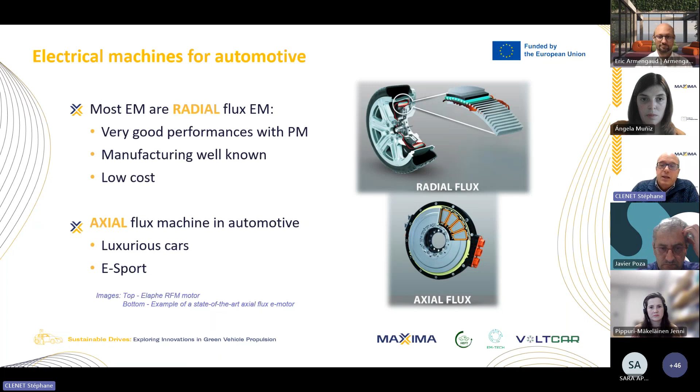Here, I don't know if you can see my pointer.

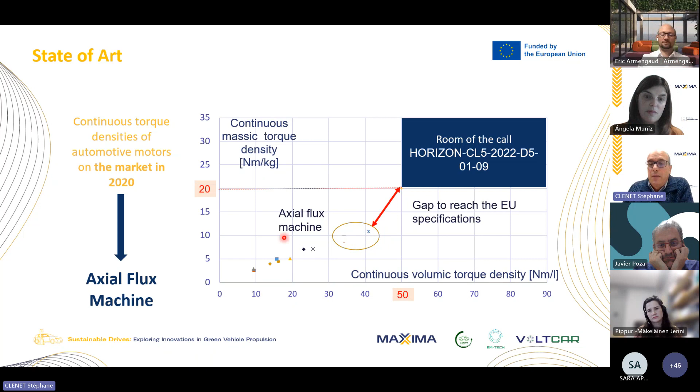Okay, so here you have the target of the project. If we look at the distribution of the electrical machines, we are quite far away from what we have to reach during the project. By the end of the 4 years, we have to reach this target here. But if we look at the electrical machines that are closest to the point we want to reach, they are axial flux machines.

So it seems that axial flux machines have a good potential to address the automotive core market, from 50 kilowatts to 120 kilowatts. But the performances are below what is requested within the project. They are still very costly, and they use permanent magnets.

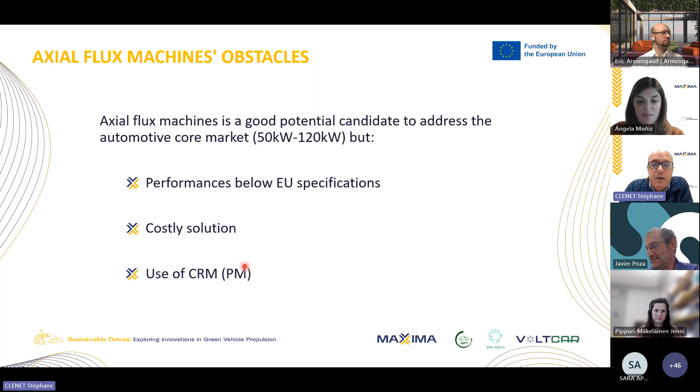So to tackle these different obstacles, if we look at the performances of the electrical machine, how can we improve them? We can improve them by using optimal control based on a digital twin. The idea here is to determine the temperature distribution within the machine, and like this be able to operate the machine up to the limit and avoid some security margin.

The other way is to use advanced multiphysics design in order to integrate all the physics involved within the machine to reach the performances. For example, we will work heavily on new concepts for thermal management.

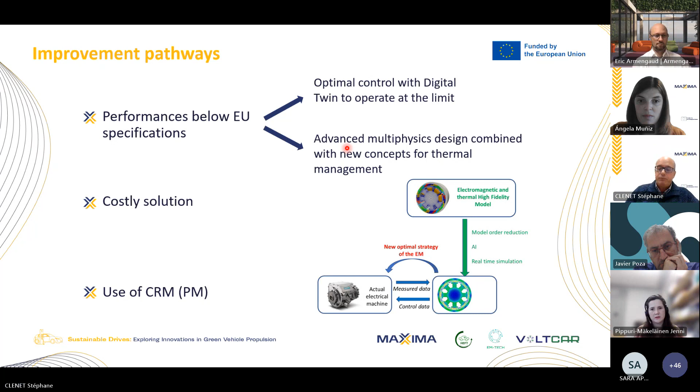About the cost, the idea is to move towards a modular design. As I said before, we have to cover a power range from 50 kilowatts to 120 kilowatts. So the idea is to build our electrical machine with modules, and like this increase the number of parts we make in order to reduce the cost.

The other idea to reduce the cost is to have a mass production-oriented design of the electrical machine. That is to say that during the design of the electrical machine, we will also include the design of its manufacturing process. The idea is to optimize at the same time the performance of the electrical machine as well as its manufacturing process flow. And we will also have to develop innovative manufacturing processes.

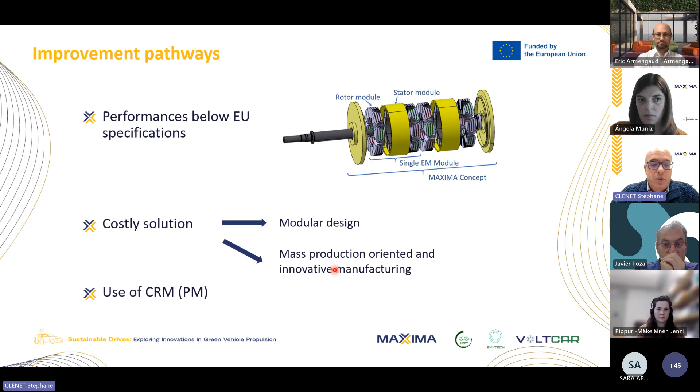And about the use of critical raw materials, particularly permanent magnets, we will work on the disassembly of the permanent magnets of the electrical machine. The way is first to work on disassembly processes, as well as integrating the disassembly into the design of the electrical machine. Not only the manufacturing, but also the disassembly of the magnet.

And we will also work on a short route to recycle the permanent magnets. The idea is to use the magnet powder directly in a recycling process in order to reuse it to manufacture electrical machines.

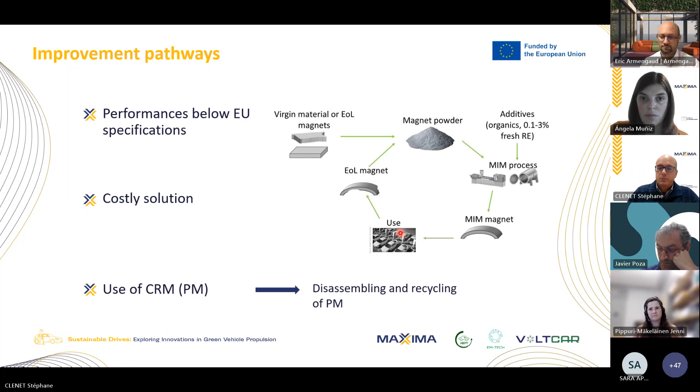For sure, we will also have to take into account the life cycle of the electrical machine in order to reduce the impact on the environment. So the main goal of the life cycle analysis in Maxima is to provide information on critical sources of environmental impacts and supply risk of EM. Our impact will be mainly evaluated on climate change and mineral resource scarcity. And also, this consideration of life cycle analysis will help for an eco-design of the electrical machine.

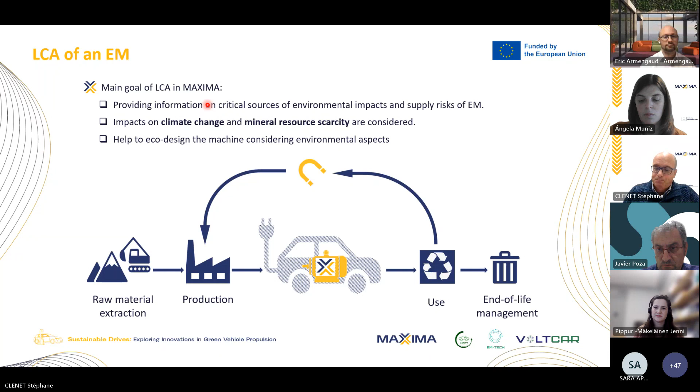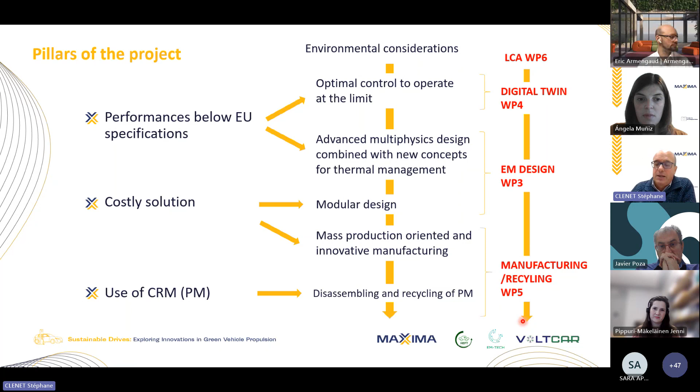So if we look at the structure of the project, here we have the different solutions we have proposed to address the different obstacles, and we have transverse activities related to environmental consideration. So the implementation will be the following. We will have one work package related to digital twin, one work package related to the design of the electrical machine, and one work package related to manufacturing and recycling. And we will have a transverse work package related to the life cycle analysis.

As input and output of the project, we'll have to define the requirements and the specification of the electrical machine. This will be done in work package 2. And at the end of the project, we'll have to evaluate the solution we have developed, so we'll develop several prototypes and test them on a test bed.

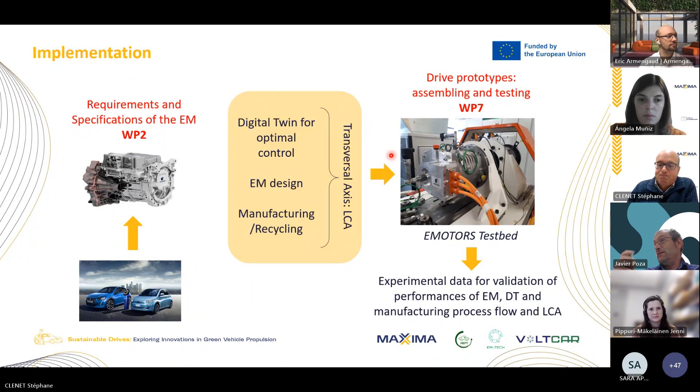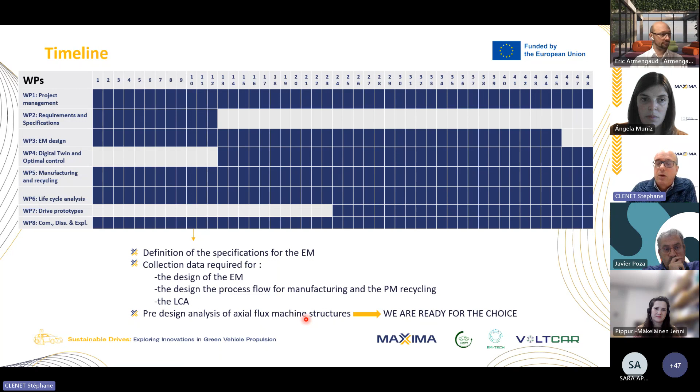So here you have the PERT diagram of the project. Where we are now: we have almost defined all the specifications for the electrical machine. We have collected all the information that we will need for the design of the electrical machine, the design of the process flow for manufacturing and PM recycling, and also for the life cycle analysis. And we have worked until now on the pre-design analysis of the axial flux machine structure, and now we are ready to choose the structure on which we will work during the project.

So about the partners, there are several companies involved in the project. There is Stellantis as an OEM. We also have Emotors as an EM manufacturer. We have several magnetic material suppliers. OCAS, in fact, is a research center of ArcelorMittal. We have Höganäs also, which will supply and work on the soft magnetic composite materials. We have a company, MIMplus, who will work on the permanent magnet manufacturing as well as recycling of the permanent magnets. And we have a company, 4Multiphysics, who will be involved in the design of the electrical machine. So if we look at the different companies involved in the project, we cover almost the full value chain from manufacturing to recycling.

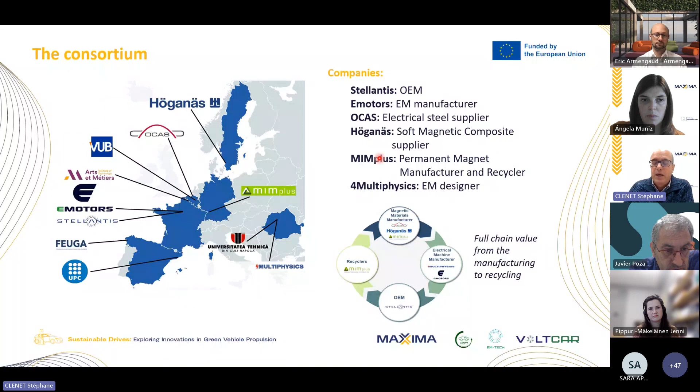There is also a foundation which will take care of the communication, the dissemination, and the exploitation. And we also have universities: the Polytechnic University of Catalonia, who will work on the thermal modeling and management and control of the electrical machine. The Technical University of Cluj-Napoca will work on the design of the electrical machine. The University of Brussels will work on the life cycle analysis, and finally, Arts et Métiers and the University of Lille will work on EM manufacturing, life cycle analysis, and electromagnetic modeling.